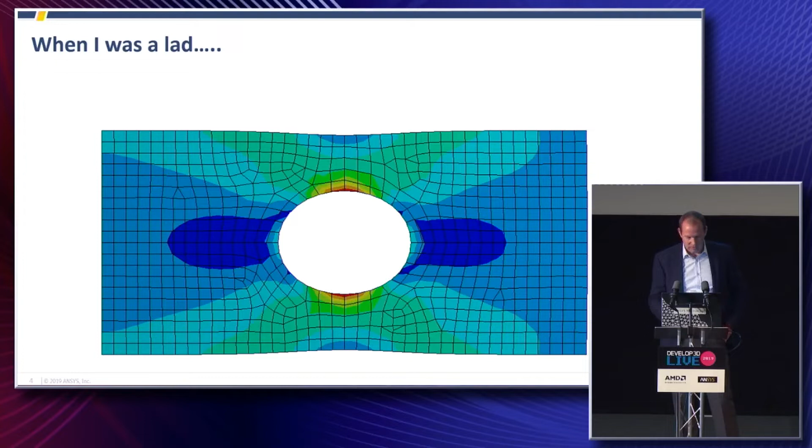When I started doing simulation, it wasn't stick models from the 1950s. I think everybody who started doing basics in simulation started out with something like this: a hole in a plate model. Pull each side and see the stresses—except it wasn't even a whole plate, it was just a quarter of a plate, because that was more efficient to run. You use symmetry conditions to get a quick model carried out.

So these are all static models. The static models are incredibly useful. They're used for pretty much everything you can think of: the chairs you sat on, the phone you carry, the cars you drive. They're used day to day by our customers and users of simulation software everywhere around the world.

But again, what I want to talk to you today about is dynamic analysis. Most systems or most products and parts have some kind of dynamic component or behavior to them.

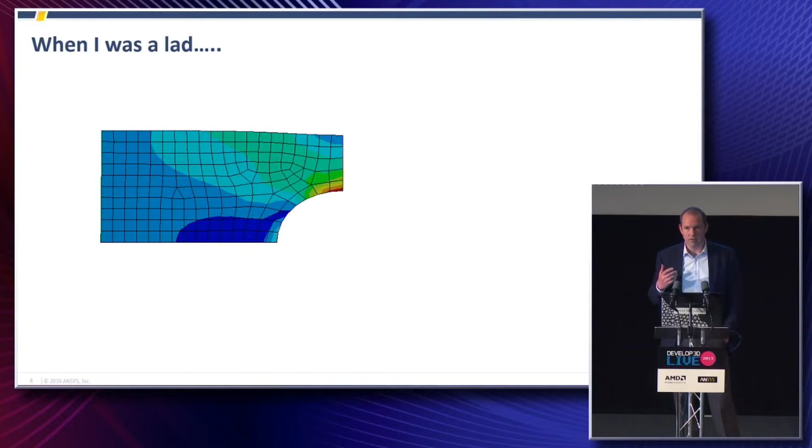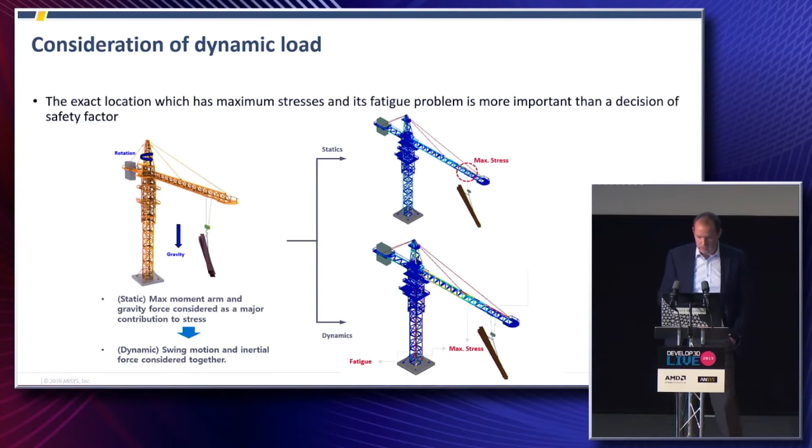So, introducing ANSYS Motion. What is ANSYS Motion? It's a third-generation multi-body dynamics simulation tool. It's got some very clever solver technology, which enables complex contact, material flexibility including plasticity, which can be included in the models, and can solve some pretty impressive analysis.

It's a complete software suite. It has a preprocessor, a post-processor—so that's setting up the model, reviewing the results of the model—and obviously the solver component as well. An integration with ANSYS Mechanical, which is the main product we sell at ANSYS for doing structural analysis, is coming very soon, starting with pre-processing.

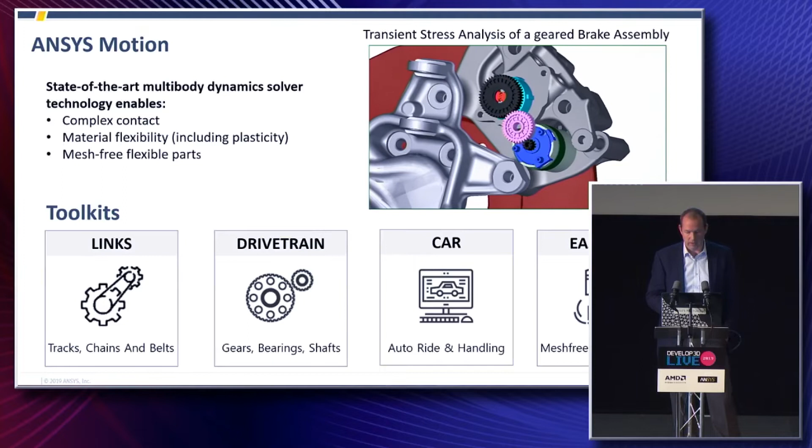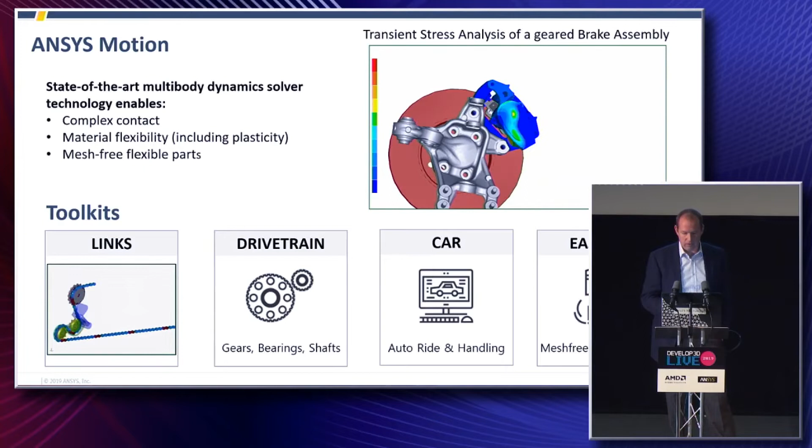Within these tools, you'll be able to quickly and accurately analyze complex mechanical assemblies. There's a series of toolkits you can add on. There's a Links one—Links is great for looking at chains, drive belts, continuous tracks that you might find on tanks and conveyors and things like that. There's also a drivetrain toolkit, which looks at gear trains, bearings, shafts, and complete systems like that.

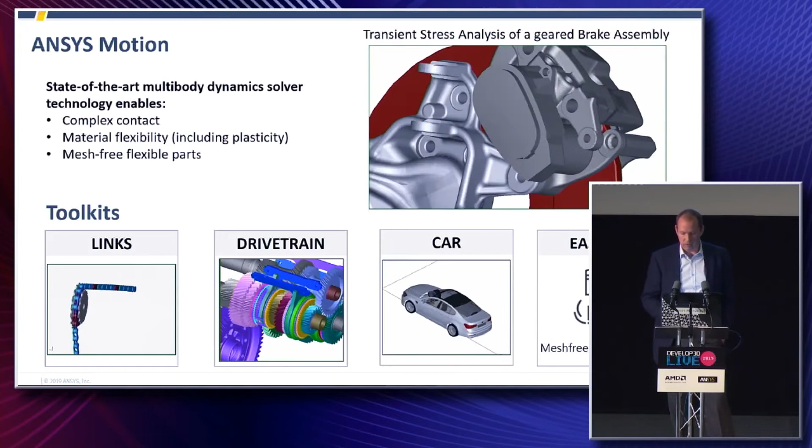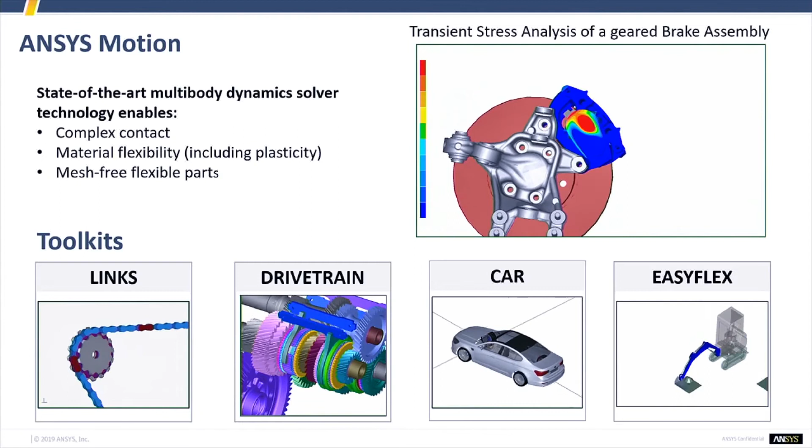And then also there is a car toolkit, which includes specific enhancements or features for modeling vehicle suspension assemblies and modeling complete vehicle dynamics. And then also there's a module called EasyFlex, which allows you to have mesh-free flexible parts.

So multi-body dynamics, MBD, is the study of dynamic systems, which can be pretty complex, made up of a mixture of rigid and potentially flexible bodies. So they don't necessarily have to flex, but they could flex, and you want to take that into account.

They can interact with each other through a series of connections, such as joints—for example, this shaft has this wheel rotating about it, or coupled by a pin. We can also look at constraints, so one thing moves a certain proportion to another thing, and also contact, which is what's going on here with these gear systems. The teeth are actually touching each other, and that load transfer and flexibility of those gear teeth is taken into account to more accurately model this whole system.

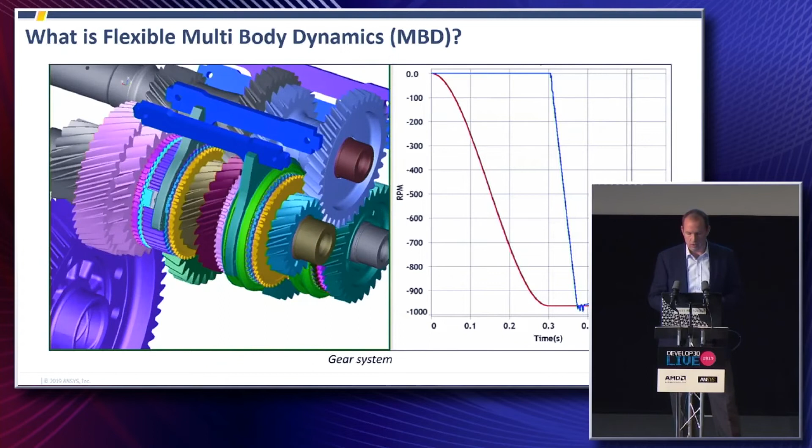Multibody dynamics overcomes one of the main drawbacks of modeling just a pure rigid dynamic system, which doesn't really consider the stresses induced in individual components while the system is in motion, and as a result imposes some kind of limitations on what you can do during the design side. Because you can't really look at what's going on with the system life, the plastic or elastic behavior of parts, and you can't take into account optimization of mass and that kind of thing. So being able to calculate all of these effects is very important.

This example here is a drive belt, the kind of thing you might find at the front of a car engine. There's a driving wheel and there's some wheels that are driven. As the belt goes around, we're modeling the tension in that component of the drive belt as it goes around. It's a very long transient run, which would be difficult in other solutions.

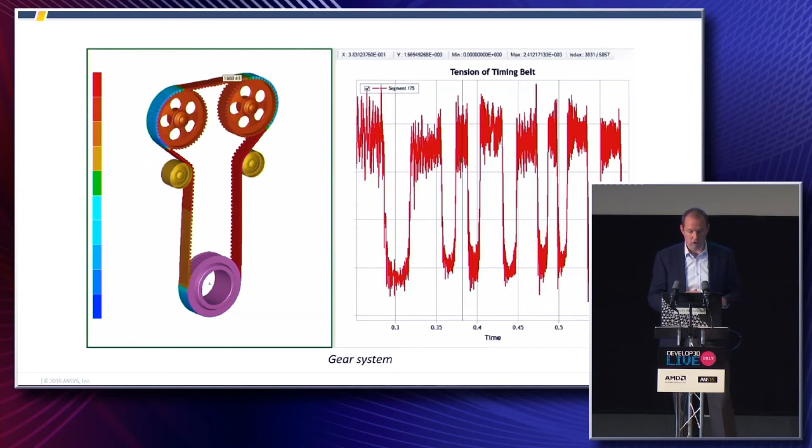So areas of application for MBD, multibody dynamics, run from heavy industry like cranes and diggers, consumer products like printers, both conventional and 3D additive ones, where we've got moving components on drive belts and control arms. Anything where you have a mechanism and are interested in the forces generated in the joints or the stresses in the individual parts. This could be a complex gear train like you saw before, with the flexibility of the gears and the gear teeth and the bearings within the system.

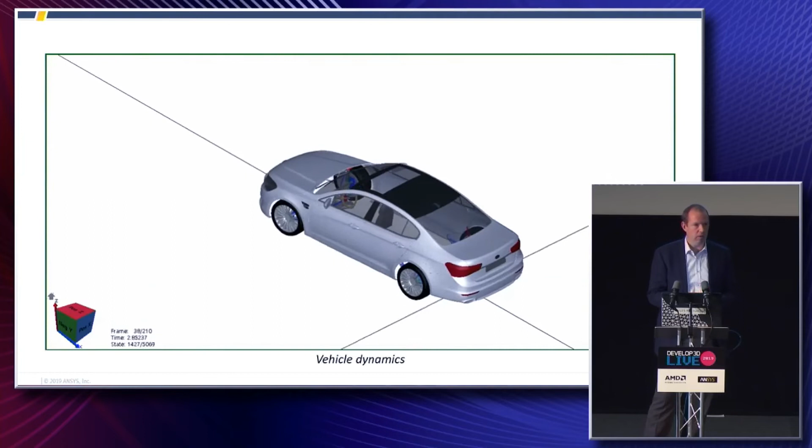Or it could be a simpler case where parts are flexible and need to have contact with each other over a long time. Or, of course, full vehicle dynamics, as you can see here.

So the example you see here is an excavator with some tracks. A customer in this case was interested in the behavior of the track when driving over some rough ground, which here is a flat road with some blocks on it.

The toolkit used here was the Links one I mentioned earlier, and what was happening in real life was as the excavator was going over the rough ground, the track was actually coming off the driven wheels of the excavator.

And if you can imagine when that happens, it sounds fairly straightforward - I just get some jacks underneath it, lift it up and reconnect things. Except when it's halfway down a hill, the hill's really muddy and it's raining, then it gets a bit more involved. So avoiding that kind of scenario is pretty important on a piece of equipment which is near impossible to get to.

So what the customer did was use this product, carried out various simulations and calculated the driving forces required to move over the blocks, and see the movement of the tracks as the wheels encountered these bumps.

They were able to avoid this track shedding issue, and as a consequence of understanding the behavior of what's going on with the tracks, extended the expected life from 2,000 hours to 8,000 hours - so a four times increase in life expectancy there.

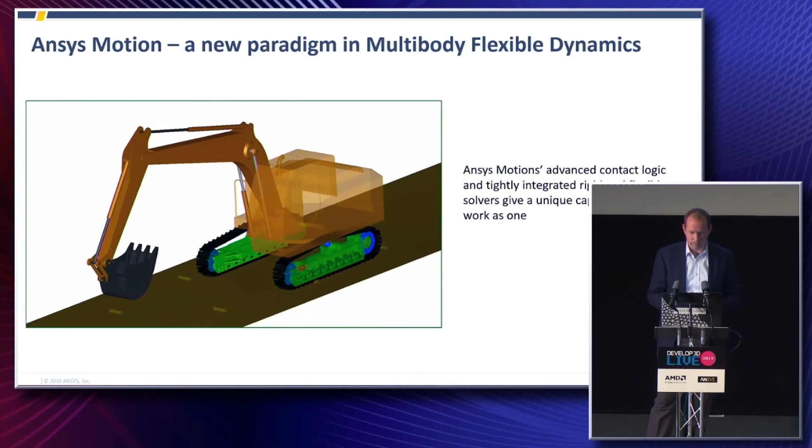So what is particularly encouraging about this new product is that it's not actually new at all. It's been sold almost exclusively in Korea and Japan for the last 10 years, with pretty good acceptance and very good success. And the product is the baby of a guy called Professor Daesung Bae.

If there are any MBD experts in the room, I'm sure they will have heard of him. He's produced or been involved with the creation of several MBD products, and along the way he's learned a lot about it. So this is the third generation solution.

The example we're looking at here is what's called a ball screw mechanism. It used to be used in steering systems - you basically turn a screw shaft and it moves the driven part left and right like it would in the steering system. I don't think it's used very much anymore, but it's quite a complex system going on there. There's lots of contact between these spheres driving along this screw shaft.

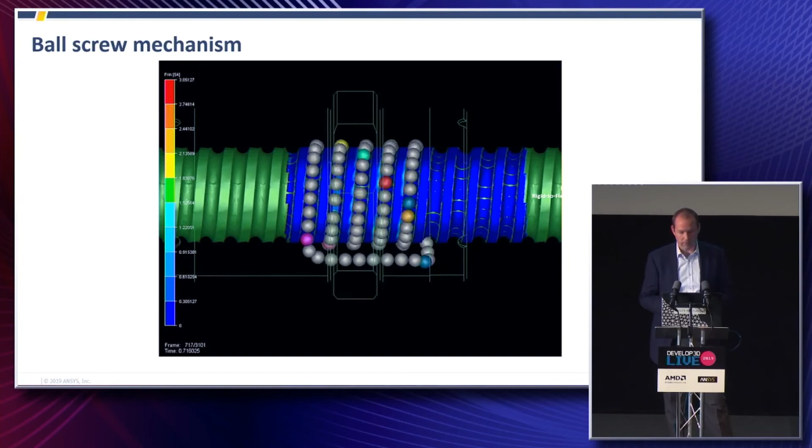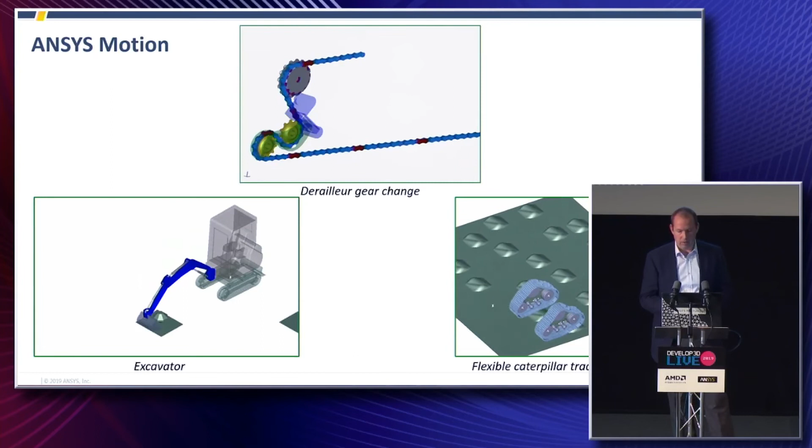So Professor Bae, as I mentioned before, learned a lot about the different MBD codes along his way and has implemented everything he learned into this third generation product, Ansys Motion. And some of the things you can simulate in this tool are pretty incredible in my opinion.

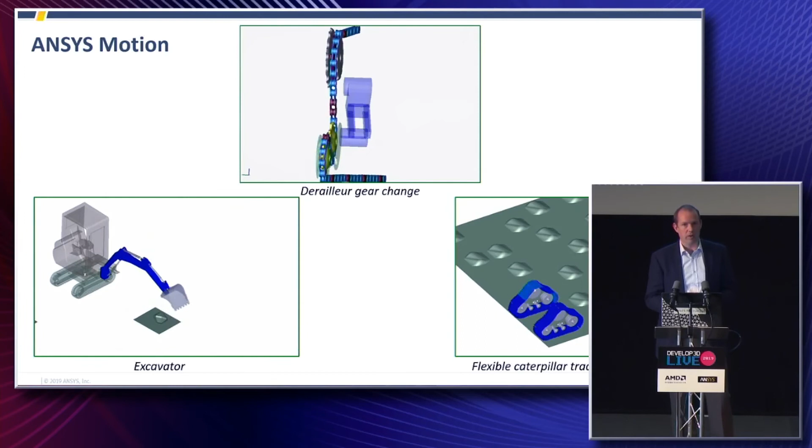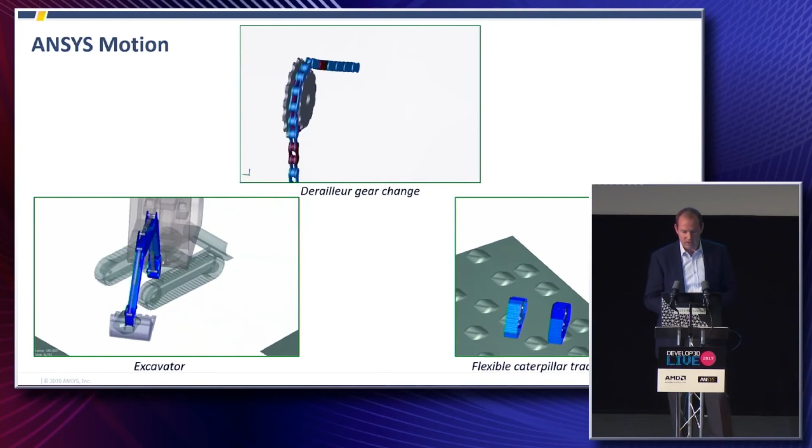I never quite seem to get my own bike set quite right, and there's always a clicking when I'm either in the highest or the lowest gear on the rear chain set. So maybe I should have a go at this tool myself as well, take my own advice.

So the last thing I wanted to show you very quickly was the promised sneak peek. Unfortunately, it's a little bit Benny Hill style - this is actually quite an old build of this new interface. This is a new interface for Ansys Mechanical, which the pre-processing for Ansys Motion will be available in very soon.

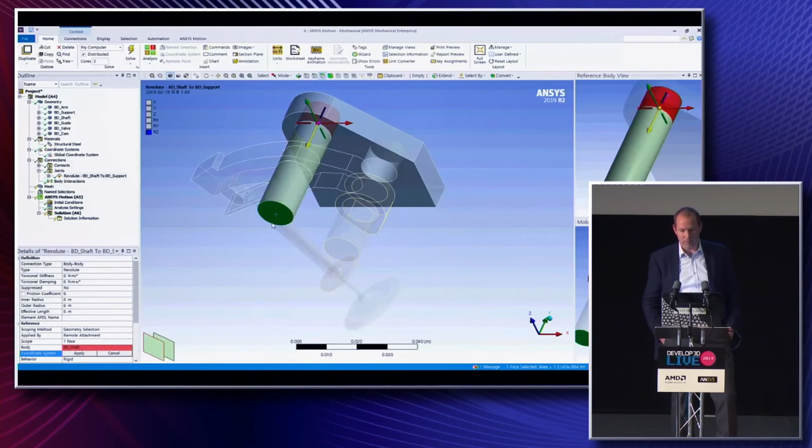This is coming in Ansys 2019 R2, which will be out in June this year. There's tons of capabilities in here, too many to list right now - a lot of things around customization, a lot of opportunities for scripting and automating workflows, and basically a huge leap forward in terms of productivity and ease of use within this environment.

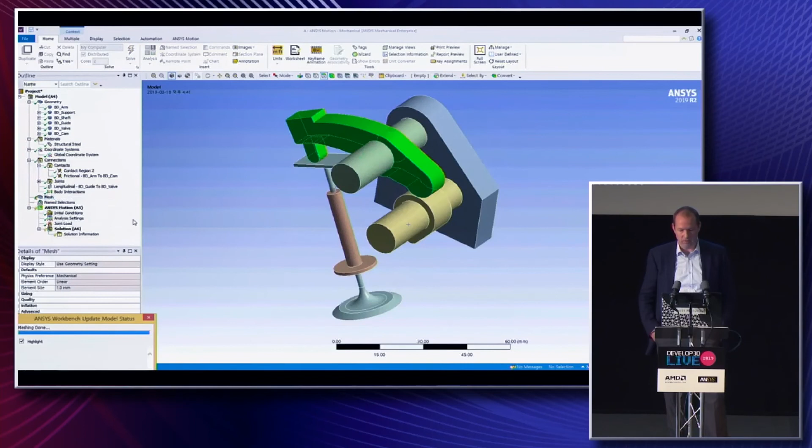So this is showing a quick setup of an Ansys Motion model, showing a fairly simple cam follower system. You'll get to see more of that soon.

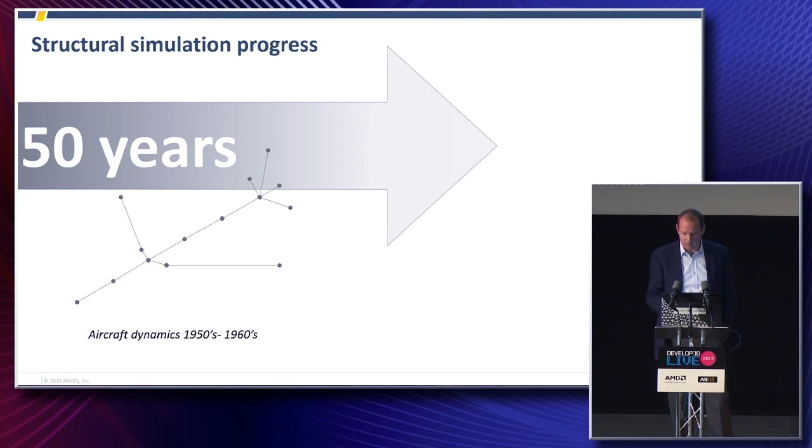So in the last 50 years, there's been pretty huge advance in dynamic analysis. The stick model I showed you was used by a major aircraft manufacturer back in the mid-60s, late 50s early 60s, and has moved on quite considerably. So these full dynamic systems now of entire vehicles are pretty sophisticated indeed.

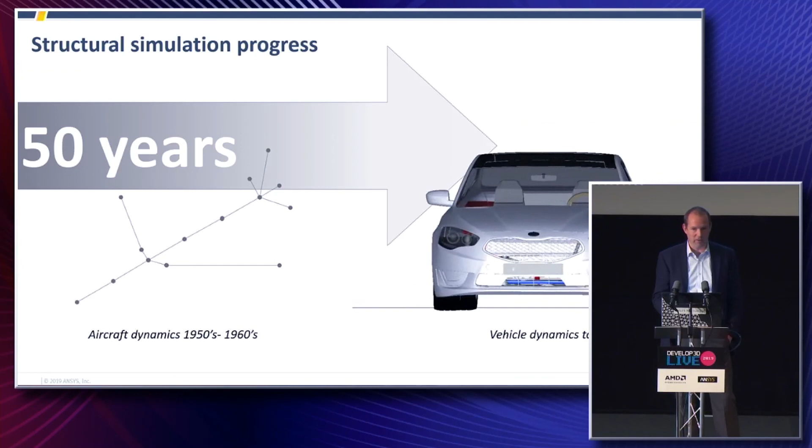I think you'll agree we've come a long way. I'm always excited to see what customers do with our technology, and particularly with this one, as the animations are pretty cool.